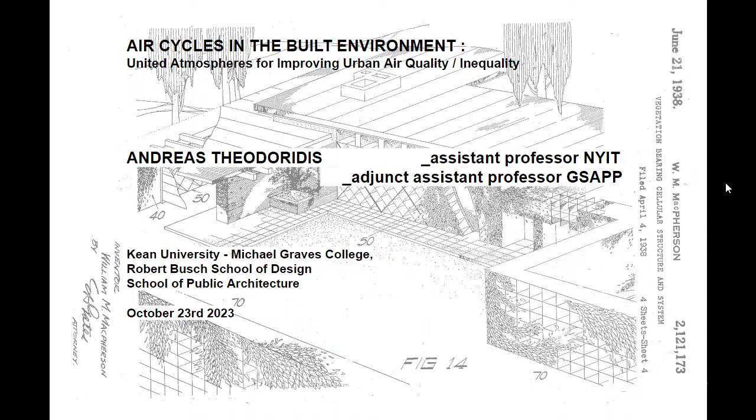And the reason why I'm going to do that, let's see if I can get this thing started. Up and down doesn't work for me. I might be doing something wrong. All right, so do I see the next one? Okay, so it's going to be on the screen directly.

So I'm going to mostly focus on two different sections, 2012 and before, and 2012 and after. The reason I'll do that is because I was mostly focusing on different parts of my work.

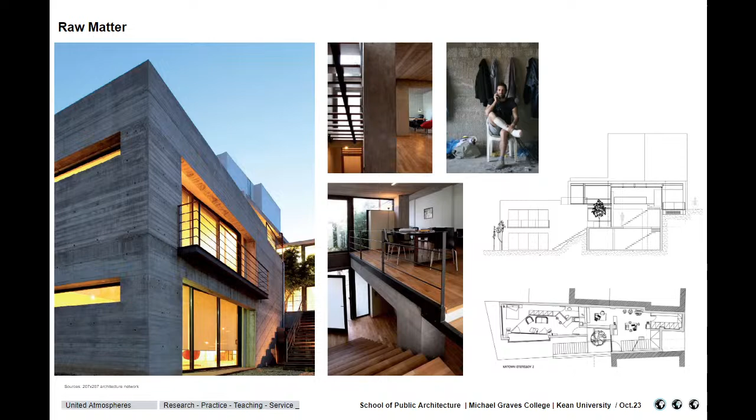Before 2012, what you see is me at one of my construction sites, overlooking some of the metal reinforcement bars, trying to do a couple of buildings in Greece, where I'm originally from. Different types of buildings, nevertheless with all the necessary details and drawings—houses and office units—under circumstances that were great, and some that were not so great, having injuries and things, but nevertheless still on my construction sites, trying to supervise some of my projects.

Small or bigger size innovations, smaller or kind of bigger projects, different materialities, different research questions, mostly focused on the use of materials—how we recirculate materials, upcycle and upgrade the kind of intention people had before they produced this kind of material into a different typology for the building section.

Here you see a project where I was reusing an existing wood floor, partially compensating the rest of the surrounding floor area with a new tile type after I demolished some of the walls—a gut renovation for a sixth floor, top floor building in one of the periphery cities of Athens.

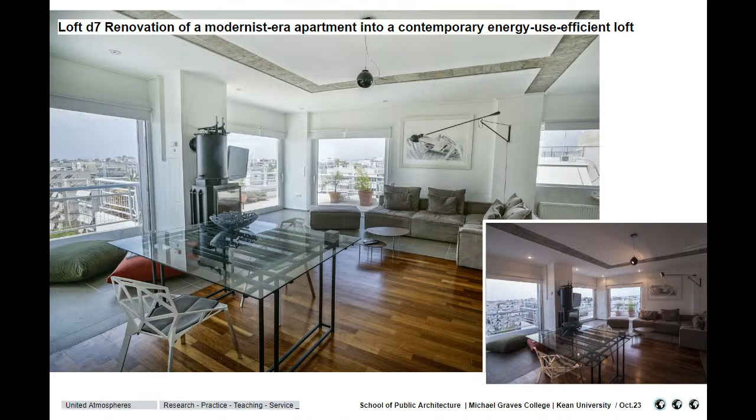Also introducing, back then, a system that wasn't quite popular for this typology of buildings—a heat device that heated the whole house and the water pipes of the systems through the burning of wood. Everyone was laughing at me back then, getting this thing onto the sixth floor with a crane from outside into the balcony of the building, and so on.

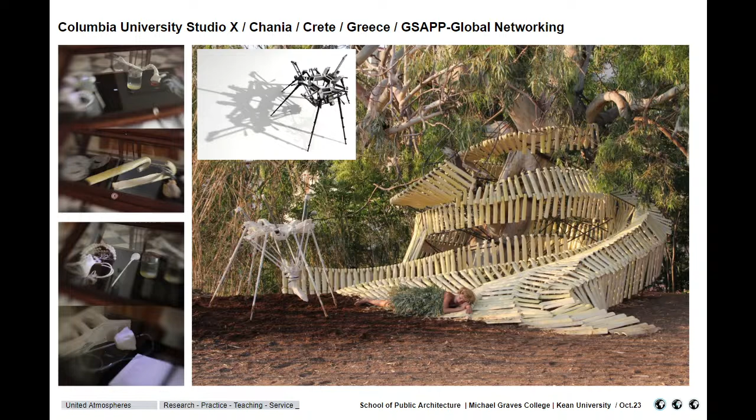But nevertheless, I was also experimenting with different kinds of constructions, different typologies of workshops—like the one you see here from back in 2013 or '14, if I remember well. This was Studio X, the global program of Columbia University with studios overseas. This one took place on the island of Crete, where we investigated with different media the life and materiality that could form a new, contemporary type of labyrinth on the same island where the labyrinth was invented a couple thousand years ago.

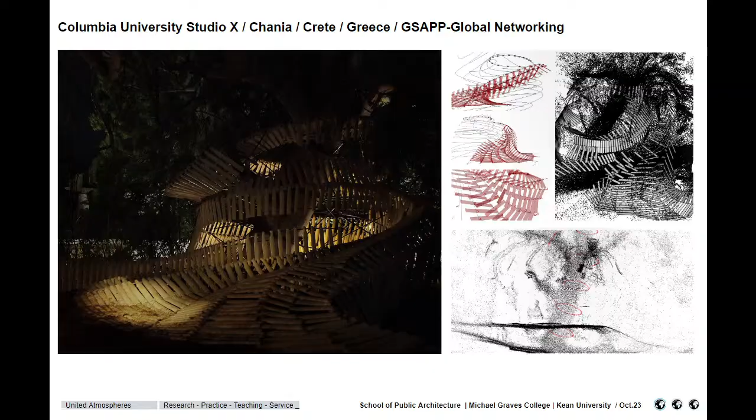And of course you can see many more projects from this individual, a little more pre-2012 professional life that I had as a practitioner, in my online portfolio, and soon maybe on my website if I manage to finish the back end of it—which I'll explain a bit more at the end of this lecture.

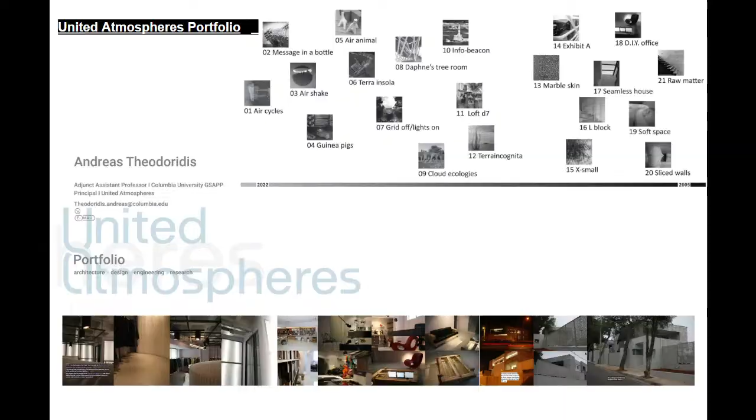Air quality on the human organism is the world's largest environmental health risk. And as a coincidence, the same kind of year in Greece, things were turning really badly in terms of air quality. The IMF was coming to the country.

During the day it's not so visible, but during the nighttime everything is quite toxic in the atmosphere. You get into your car in the morning and everything smells awful. You don't realize that might be toxic back then, but you realize something is wrong.

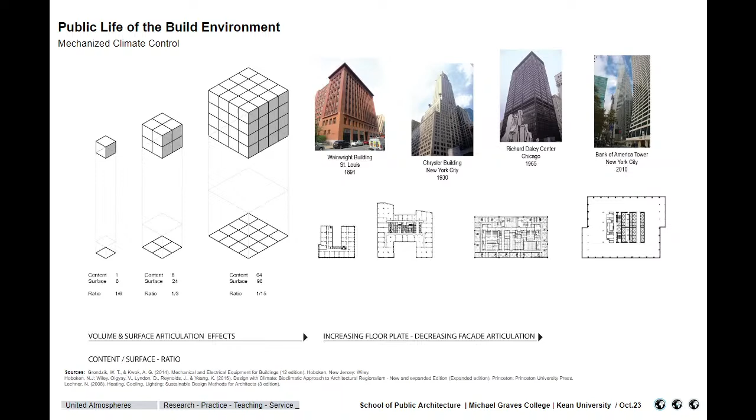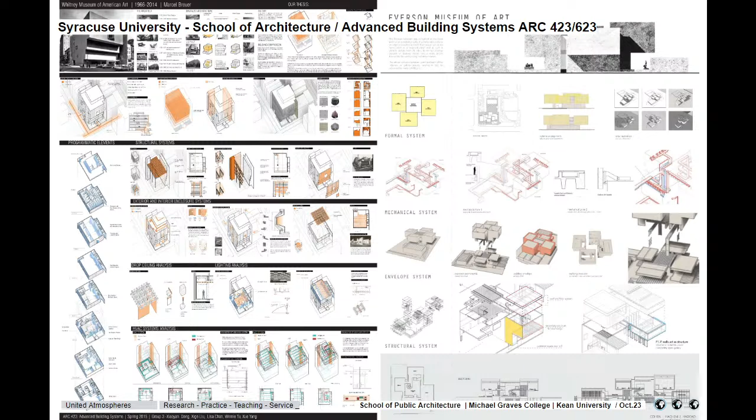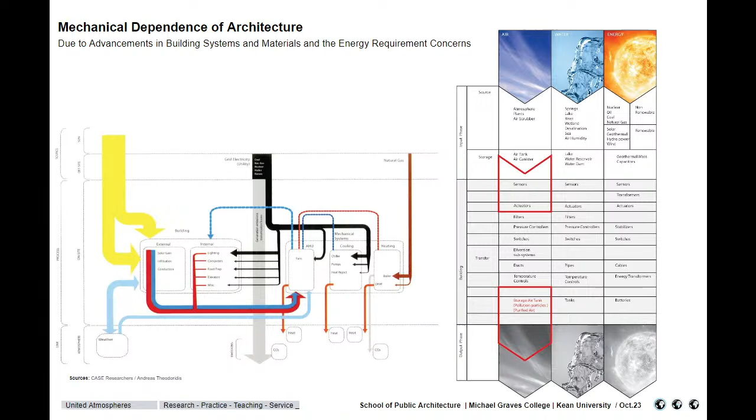Then moving further into my PhD at Case, starting to question things about mechanical systems, how we ventilate space, how they're related to the overall volume of buildings, what kind of effects they have in terms of how we handle air from the outdoors to indoors.

And why we consider in the discipline that we're dealing with two different things, like the outdoors and the indoors — what kind of envelope systems we currently use, how we describe them, what functions they have, why they have to be addressed so linearly that they only function in individual aspects like energy reduction, air handling, or glare conditions. Or can they maybe function in multiple layers? Can we reinvent a type of envelope?

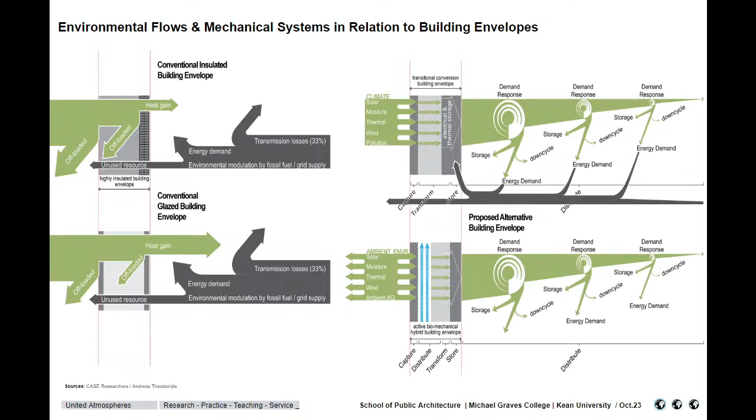All these were questions that I didn't necessarily have the experience to answer, but I was trying to figure out if I could navigate around the subjects in a more profound way, I guess.

In parallel with my PhD studies, since I had this practitioner's background as well, I was helping with other studios at RPI, dealing with materiality, how things come together, different types of materials that I hadn't used before.

What you see here is coming from a company that was trying to create a new type of bottle that wouldn't end up in a landfill, but would come together almost like a jigsaw, like Lego pieces building to each other. Everything you see here is self-assembled — there's no glue, no adhesive, nothing else. It's just these bottles standing alone.

We were trying to investigate how this new approach from the Friendship Products company could be a solution for regions of the world that might have some sort of catastrophe — a war zone, an earthquake, a hurricane, or something like that — where we would need to address these kinds of questions and maybe help people a little bit by sending this kind of equipment.

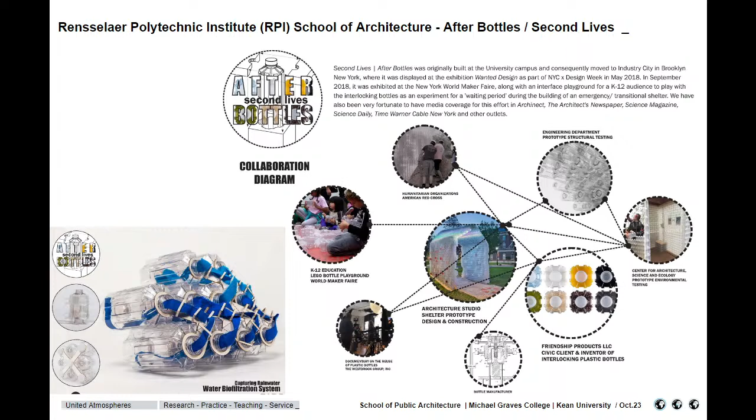So they use what's inside the bottles, and eventually turn them into shelters that can provide shelter for the first few days before everything else is put in place.

The questions I was having around this subject were not only about materiality and the relationship of things, how they get together, but also about scales of inquiry. What would be the scales of intervention of the systems we're looking for? Would it be global scale, urban scale, building scale, room scale, micro scale, or even nanoscale, since we are talking about air pollutants?

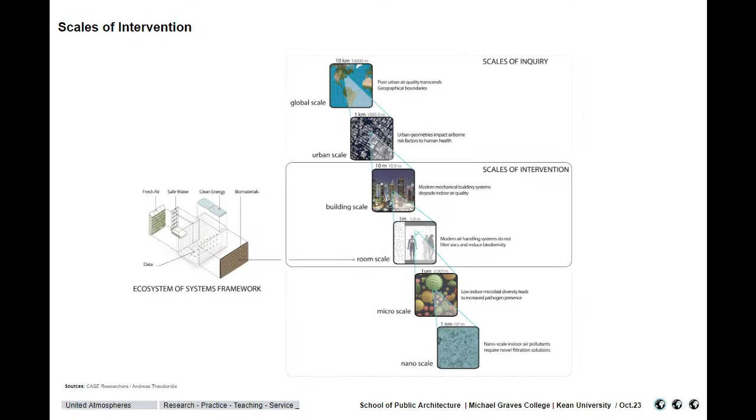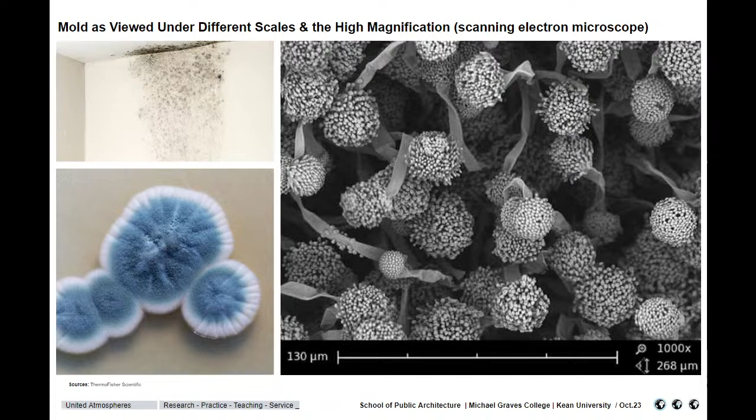And then mold as it's magnified into the micrometer scale. It looks interesting—it might be one of these nice parametric drawings you get out of Rhino, right? But in reality, it's the same thing we see in the wall, in an entirely different scale.

I was also trying to teach myself and educate the rest of the community. The slides you see now are from my last year course at GSAPP. What kind of scale are we talking about when we talk about air pollutants? We keep talking about micrometers.

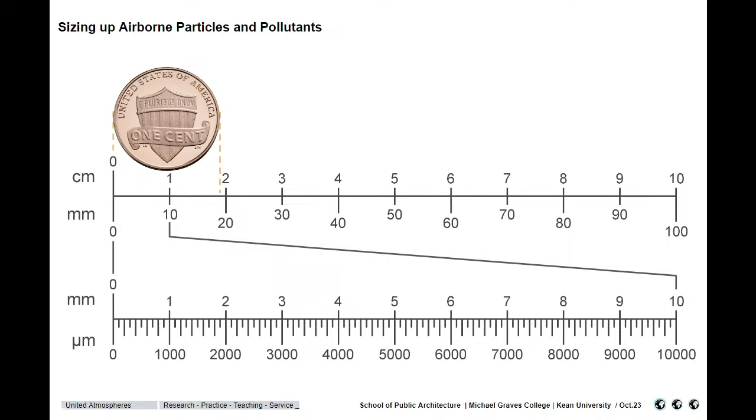Usually the highest size of pollutants we see in our environments is particulate matter 10, meaning particulate matter at 10 micrometers. What you see there is the size of the coin, the penny you saw before, with particulate matter 10. What you see is sand, a fine particle which is 90 micrometers in diameter, at the size corresponding to the coin. And then what you see around the sand, the blue spiky pieces, are particulate matter 10.

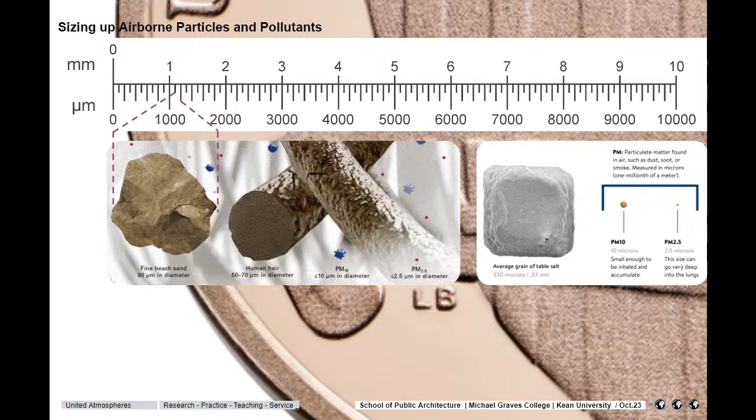The red ones are particulate matter 2.5. And all the obnoxious pollutants we're trying to find in our built environment are way below what you see there, the red spiky things. So you get a sense of what we think is invisible. In reality, it has a substance, a physical size, physical qualities, and we need to figure out ways to deal with these kinds of things.

I was also trying to investigate what we measure in our current environment—what is considered a pollutant. We know about particulate matter, NOxes, and other pollutants that the EPA, the Environmental Protection Agency of the United States, is measuring. CO2, though, is not considered a pollutant.

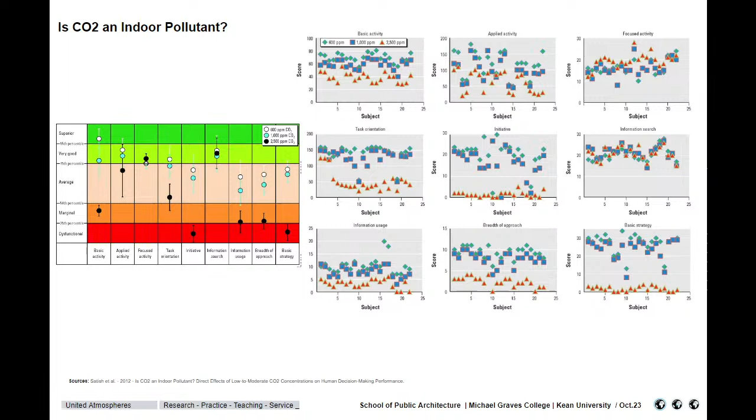Studies have recently shown that even at low levels of 600, as we probably have inside here right now in this space, CO2 has cognitive function effects on our brains. It makes you feel a bit more sleepy, makes your brain function slower, might make you unable to concentrate as clearly—but nevertheless we don't consider it a pollutant, because it doesn't kill us instantly, I guess. It needs to take a few more years.

I was also studying microplastics. Nobody considers them pollutants yet, although now with the advent of electric vehicles, they are emitted at higher rates into the atmosphere than the regular pollutants we were talking about before.

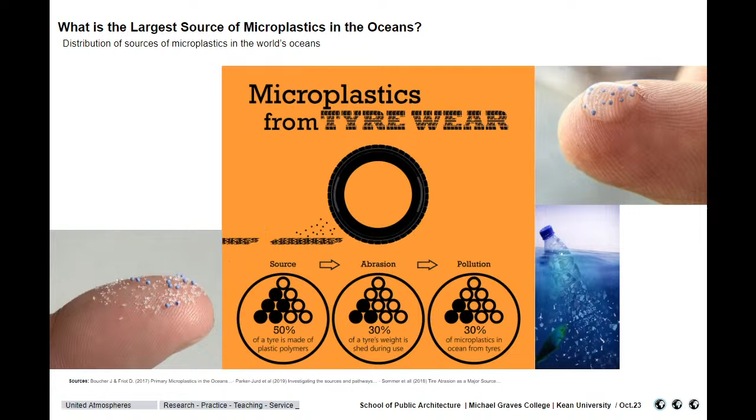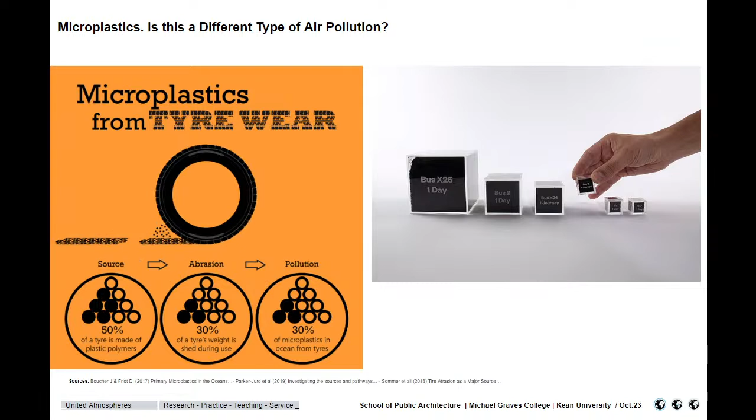The reason is that electric vehicles have heavier batteries, meaning the friction car tires have on street pavement is higher, and every time you use your tires they degrade at higher rates, creating higher concentration levels in the atmosphere. What you see in these transparent boxes is what car tires emit in a day from different types of vehicles in London. They seem concentrated and harmless, but imagine all these things getting into your lungs while walking in the street next to a bus or a car.

The idea was that I needed to study further how we deal with these questions—how we start understanding what kind of filters we're using in our buildings, what kind of equipment we're using, how we're trying to deal with these air pollutants.

And do comparative studies of the filters we consider more regular versus the ones considered more upgraded, like those used in medical labs and clean room spaces—the HEPA filters, the high efficiency filters. I can tell you fascinating stories of how the US military thought that after a radioactive incident they'd be able to get bulldozers and HEPA filters to clean the cities, and that's why they invented these filters.

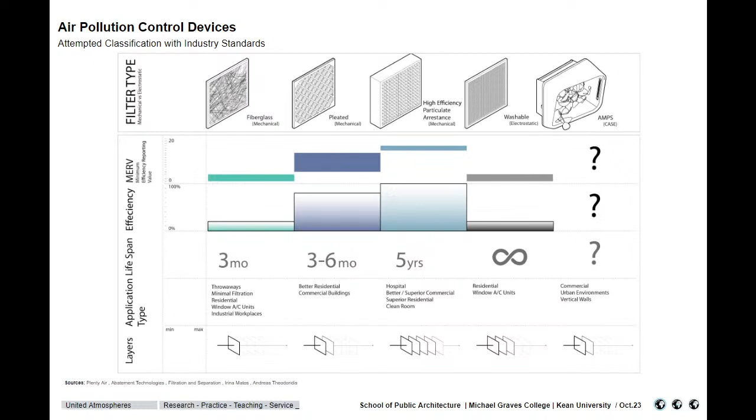In reality, though, they don't do much except for reducing some of the bigger size particles in the atmosphere. And I know it's a little daunting, but I can verify it with research work I was doing in my PhD.

It's not purely scientific. It tries to create a narrative mostly about how clean the air atmosphere could be in these places without disturbing the industry of production.

So in China, for instance, you're going to see some of the highest end pollutant levels just to make sure that they get below these levels and everything seems to be clear. But this is not the reality.

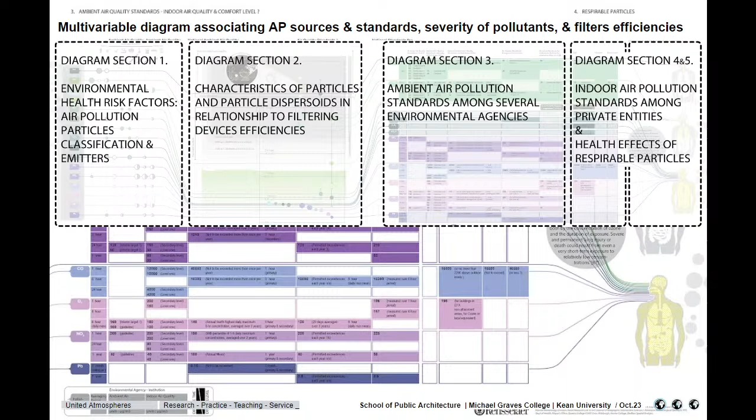Not only do they alter and manipulate what is considered pollution, they also don't measure a lot of them. And whenever they do, they don't measure them in a synthesis of what we understand as air pollution in our environments. We don't breathe air pollutants in isolation. We breathe them in a mixture of different pollutants, but we still measure them as being isolated in the environment.

I'm not going to focus too much on this diagram because it's very complicated, but the one thing you might need to focus on is that man-made pollutants—because there are also natural-made ones like volcanic ash and pollutants from forests—tend to be smaller in physical size, coming from incomplete combustion, and more lethal.

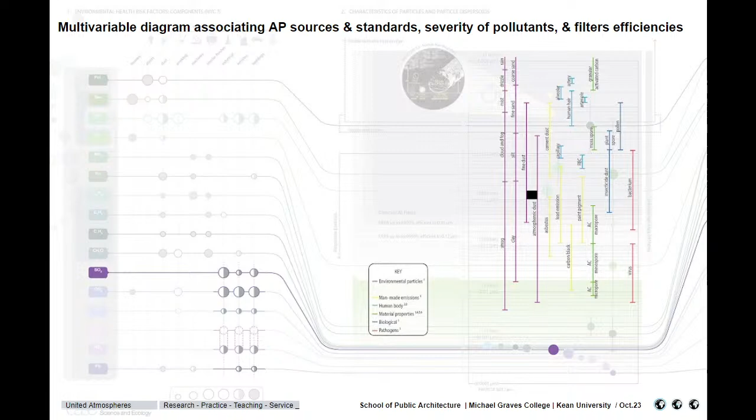Just to give you a sense of what I mean by lethal: air pollutants these days don't just go through your respiratory system into your bloodstream. They can go directly through your soft tissue to your brain. They're not even going through your respiratory system to the rest of your body organs—they're going to travel directly to your brain, affecting your brain function if they are small enough.

I'm sorry for bringing all this daunting information to you. I'm just trying to make sure we get a kind of perspective about the things we're talking about here. I was also terrified, and I'm trying to find solutions—that's the good part, I guess.

So I've been studying buildings, as I said, and I've been hearing about all these things—big planned auditoriums like this that have mechanical systems in them. Why do we need mechanical systems? Why don't we have naturally ventilated spaces? I'm coming from Greece, where windows barely close during the summer, not to mention even the winter sometimes. Why do people need all these kinds of systems for their spaces?

And I was thinking, well, why don't they have operable windows anymore in the States? Which is another question we can discuss later on. But I guess it was a very weird experience for me when at some point I ended up in a hotel in my first years in the States.

Amazing scenery, the hotel room was amazing, the lobby was great, everything smelled nice, and you could hear all the spring sounds from outside. But then you enter the building, and everything was in isolation—no operable windows, no humidity, no smell, no noise, no nothing.

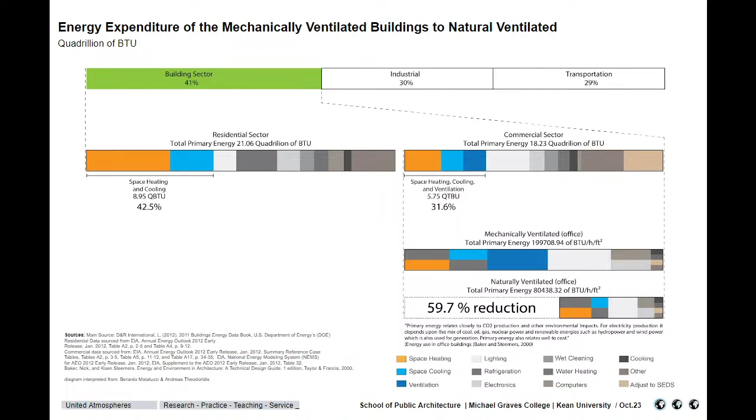That was back in 2012, maybe. But something was off.

And then I was trying to figure it out, and also trying to predict if we have to alter this mechanical to natural ventilation approach, where could that kind of technology be implemented in the future? Because the current building stock is going to be a little more difficult to adapt. What about the new building stock of the future?

So I created a series of maps trying to define how we're going to realize where the problem currently is, where the world population is going to keep growing, and where they're not going to have enough money to pay for mechanical systems. Not because they're underprivileged, but because I truly believe that in spaces that are renovating or developing economies, they can set a different paradigm, start thinking differently from what existing markets have reinforced into the built environment.

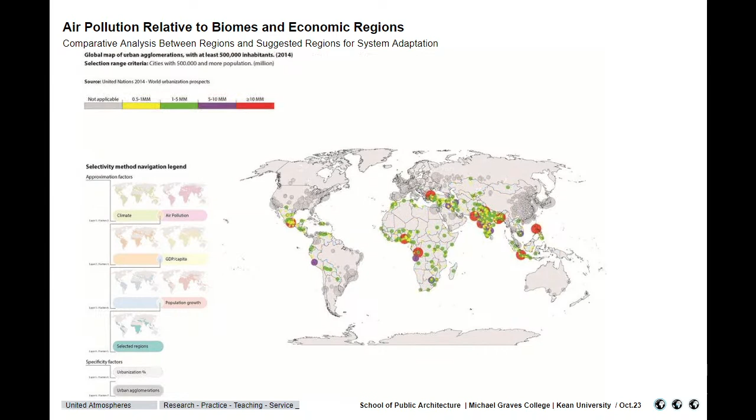And so I developed more detailed diagrams, almost a Venn intersection approach, trying to realize all these things through Köppen diagrams, World Health Organization diagrams, maps, data, GIS analysis, into 1 by 1 kilometer analysis, getting into numbers of where all these things are going to happen.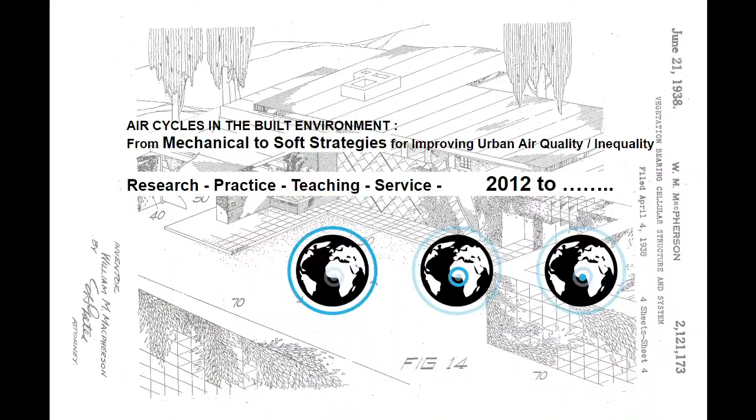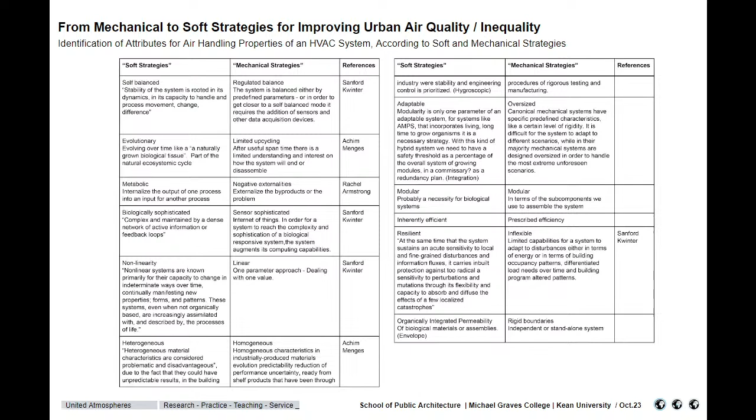But the important thing is that I was trying to develop, as part of my PhD work, how we move away from mechanical systems into what I was calling back then soft strategies. What soft strategies would mean for other people, I guess it would mean maybe self-balancing systems, evolutionary, metabolic, maybe biologically sophisticated, non-linear, heterogeneous — we can go on about how other people were defining soft versus hard — but the main idea is that we needed an entirely different type of system.

And that's what you see here. It looks like one of the regular green walls you might recognize from restaurants around you or other places, which is becoming a hit these days. But the one you see here also has a back end. The one placed here is actually in the Public Safety Answering Call Center 2 in the Bronx. The first one, I believe, is somewhere in Brooklyn, but this one here is in the Bronx.

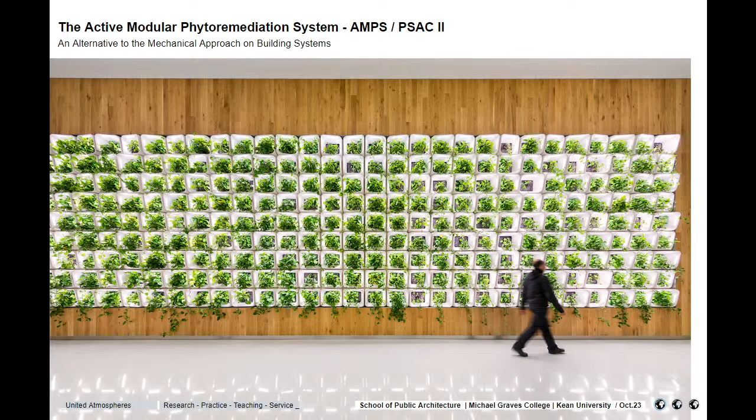It's a building that was developed by SOM. Back then, as I was saying, the program I was doing my PhD in was a hybrid program between SOM and RPI. We were stationed inside their SOM office in Wall Street, being the research department, and whenever they had a project, we co-developed it with them. This is a functional green wall — and what I mean by functional is an active green wall that uses energy to drag air through the rhizosphere of the plants in order to ameliorate some of these pollutants.

So this is what I mean by air pollutants and phytoremediation. We know that plants already reduce some pollutants through the leaves, but what we found after NASA research 20 years ago is that the rhizosphere of the plants actually does a much better job, by a magnitude of 200 mostly, depending on the plants you're using, and most importantly, the microbial community that surrounds this rhizosphere. The only problem is, guess what — the rhizosphere is inside the soil. So how do you drag air through that? I guess that's where the green walls we're working on come into play.

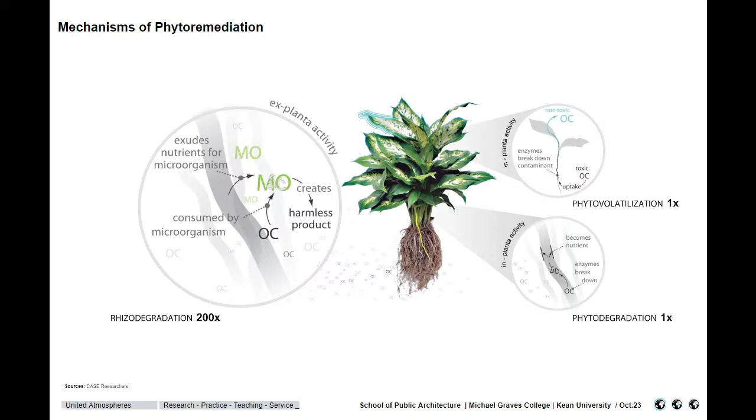They are more or less what you can describe as a vertical hydroponic system. It sounds nice and easy, not anything major to achieve, but plants are living organisms, which means you need to regulate the humidity, the lighting conditions, the circadian rhythm, what kind of microbial communities will eventually evolve there, the typology of the system, and keep them alive. It's not a mechanical system that you maintain every year or every six months, switch on the power button, and everything performs. Here we're talking about sensitive systems that have all sorts of other attributes you need to maintain — an important factor to consider when dealing with this kind of system.

If we start evaluating these systems in comparison to HVAC systems with the metrics we currently use for mechanical systems, they underperform. But if we use more inclusive metrics, like biophilia, air pollution, and maybe food production, which we are more recently investigating, you might realize we have a different sense of how we measure things.

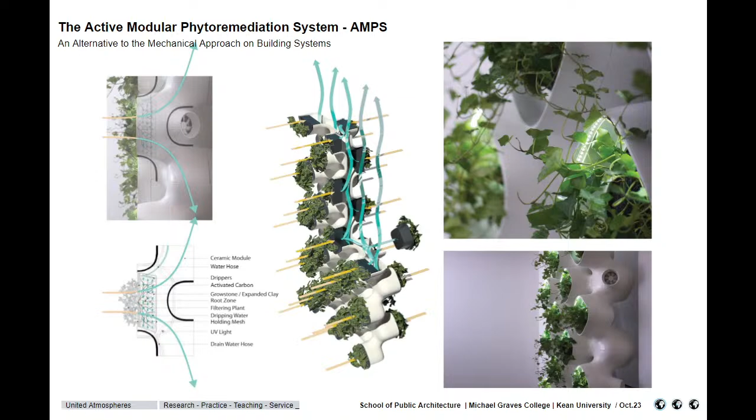I assume most of us who are around the building sciences know this famous mantra about 90% of our time being spent indoors. It's very interesting to consider these kinds of things. We also know that on average, 40% of the energy is consumed by heating, cooling, and ventilation systems in the States and other places.

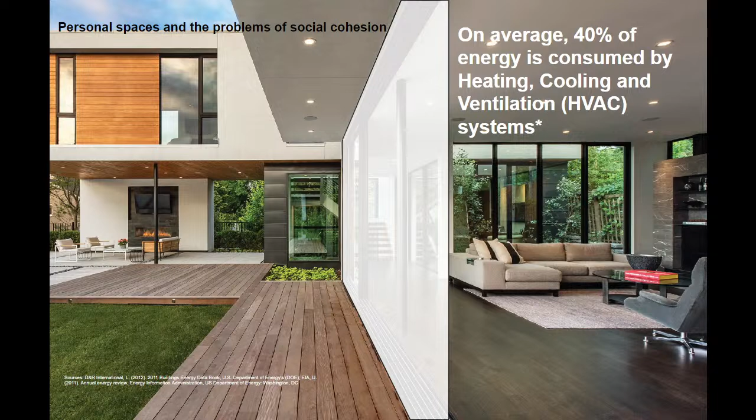But in reality, one thing we don't necessarily discuss is: is it the same for all sorts of buildings? Is it the same when the environmental conditions are favorable? And if so, how significant could the percentage of time we spend indoors be? For instance, if we have natural ventilation, does it really matter that 90% of our time is spent indoors? Do we use the same energy for regulating our space while we live there?

That's kind of the questions that brought me into developing this vertical ceramic wall system I was talking about. Within this context, my research focused on investigating a reinterpretation of the functional scope of the building envelope as a device to mediate both exterior and interior fields of atmospheric pollution.

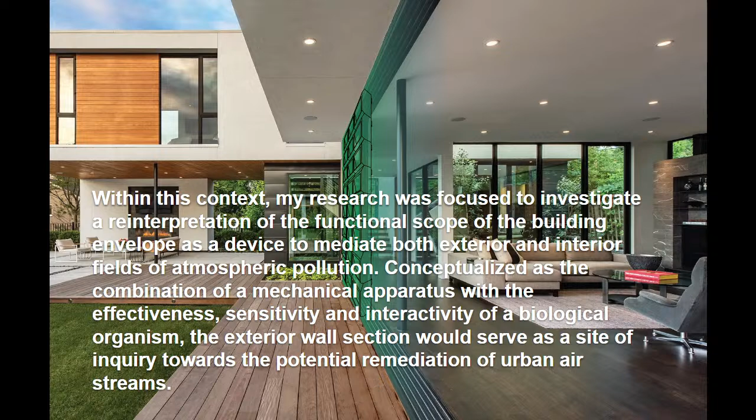Conceptualized as the combination of a mechanical apparatus with the effectiveness, sensitivity, and interactivity of a biological organism, the exterior wall section would serve as a site of inquiry towards the potential remediation of urban air streams.

There are a lot of these systems for indoors. There are only maybe one or two of them for outdoors, which is active and not a facade green that doesn't perform in any other way except evapotranspiration and bringing temperatures down into buildings.

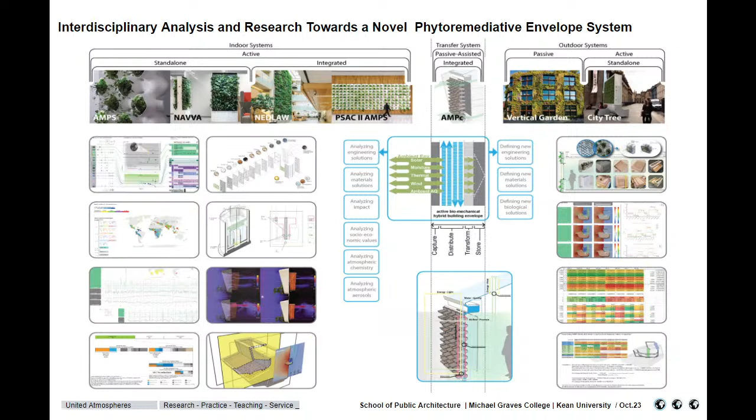What I was suggesting is using this in-between system, which is an envelope system. In my work, I've been analyzing existing systems in terms of materiality, and why do we need to

fabricate and market all these systems as such, to become a product, a commodity. Do we need to have all these materials for these kinds of systems? After all, we only need three major components: air, water, and energy.

Those are the three environmental flows that, if combined together, we can actually create a functional wall—and of course we need the plants. Everything else is supplementary; it's either there to withhold another system, tunnel the water, channel the energy, or whatever that might be.

But we don't necessarily need all these different materials. That's what I was trying to show—that for the system I'm proposing, we can minimize them to the absolutely necessary, if we don't consider them as a product or commodity, as something we need to sell to clients.

If, for instance, we could substitute in several regions of the world a component we're already using to build our houses, our indoor spaces—so if we could substitute brick with something that would be a functional new brick—you could actually get into

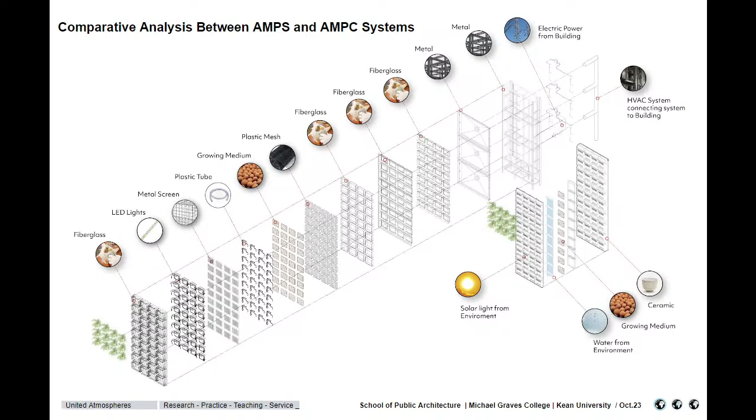minimizing this material use. And of course, I was trying to do these physical experiments because, as I said, our PhD was about applied research.

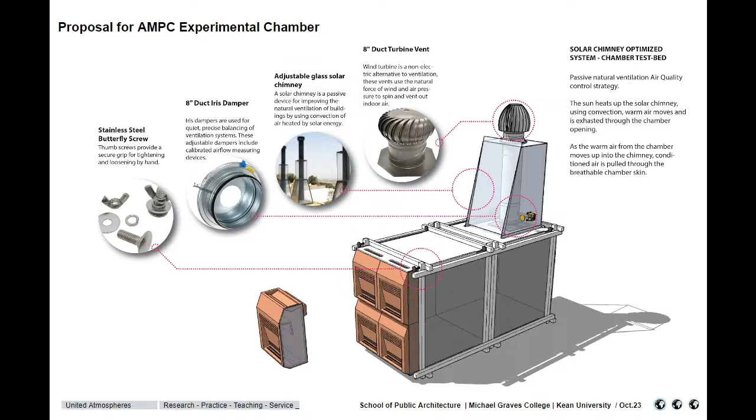And then, guess what? By the moment I was ready to get inside the lab, coronavirus was there. They kicked me out of my office and my lab in one night. Even my passport stayed in there, and I had to get a special permit to go get my passport to go back to Europe for the coronavirus period.

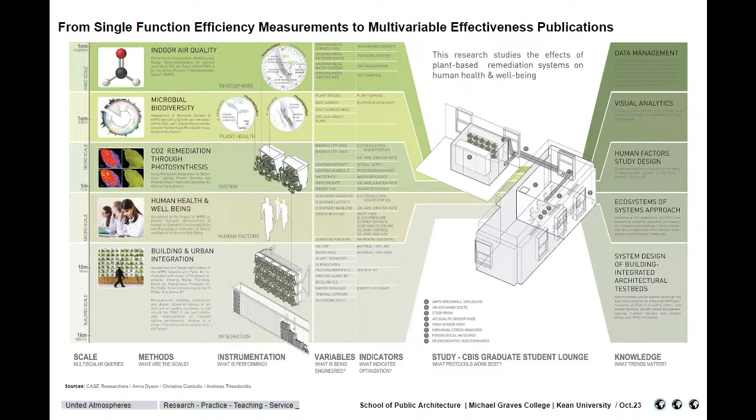So I transformed all my research into digital, upgraded my diagrams. We had already experimented at a different scale with human subjects.

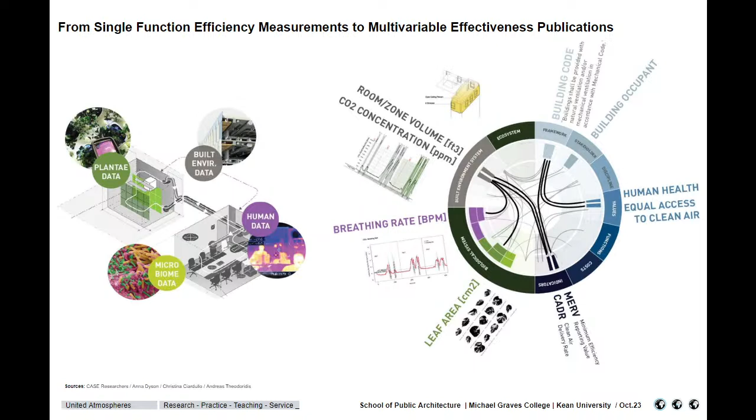As you can see, the diagrams were talking about this kind of data that I was trying to get out of these devices, the kind of environmental airflow chambers that I was trying to achieve here. I have already defined the variables that I was trying to measure, mostly related to airflow, as you can see.

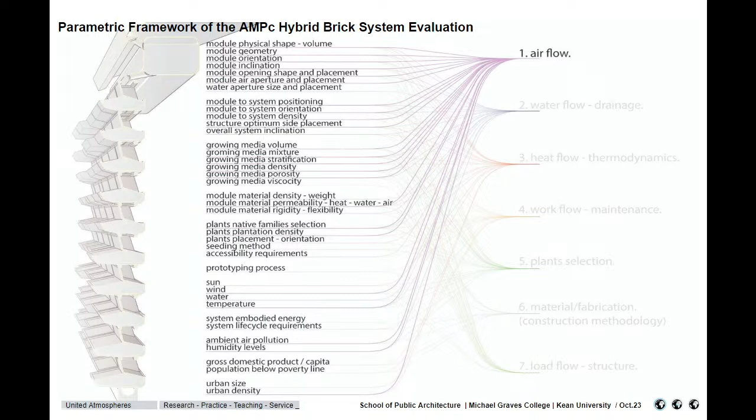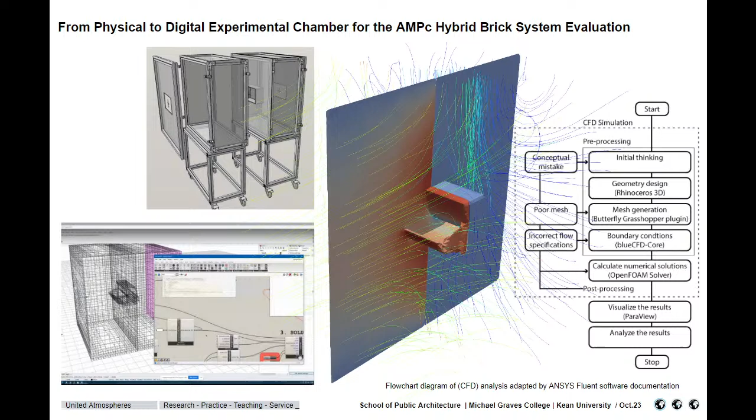And of course, then I had to transform all my research into a digital chamber. So I was struggling for the last 3 years to transform everything into a computational fluid dynamic environment, turning all my work into CFD, analyzing some of these brick walls, trying to define what kind of digital variables I should include into the computational fluid dynamics.

So I correlated air pollution with wind speed, temperature, and relative humidity in 3 different cities: Athens, Mexico City, and New Delhi in India, the worst air pollution environment by far in the world. The reason is because they have all these mountains surrounding the city that don't allow the wind streams to disperse the pollutants and get rid of some of these concentrations.

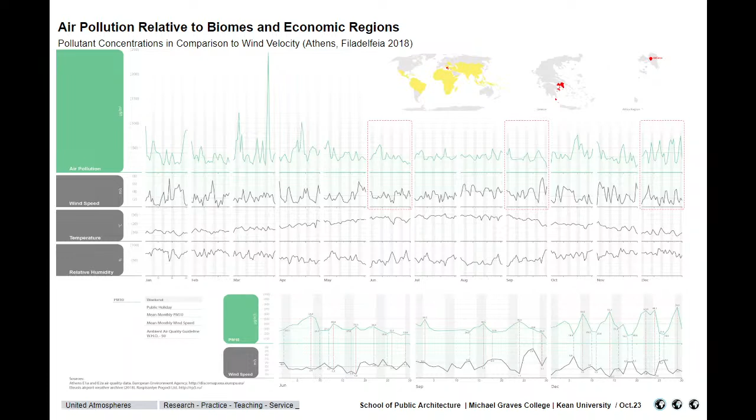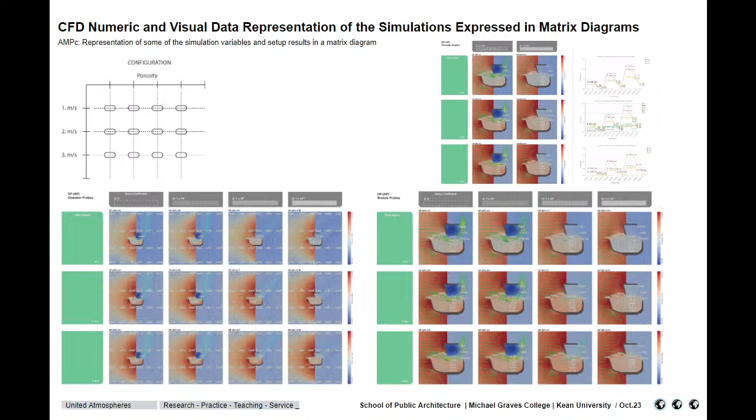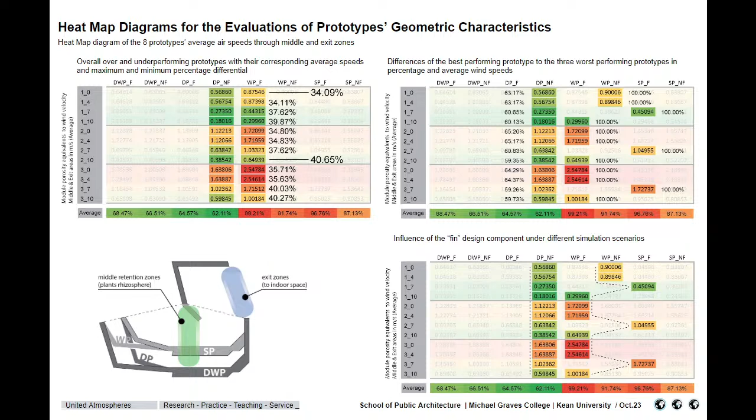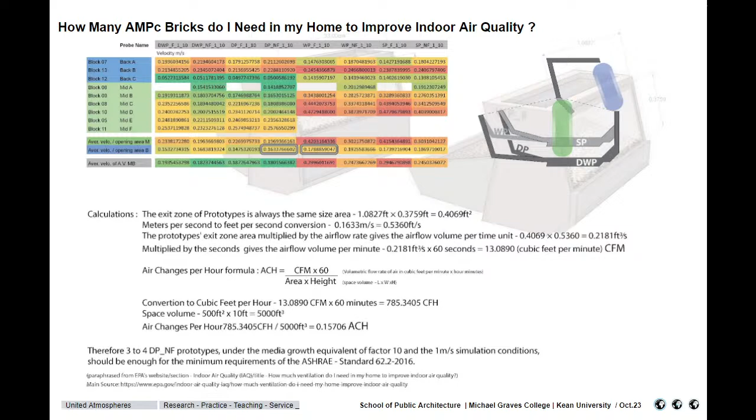As you can see down there, 4 different types of structures compared through heat diagrams, trying to identify how many I might need per ASHRAE metrics, just to make sure that whatever I'm describing here is not way out of context. I don't want to scare you with all these metrics and numbers, but the idea is that everything was here.

And then, of course, after all this work, maybe a decade of work, I was thinking, what am I doing as an architect? How am I incorporating all this work into the rest of my professional activities? This is where United Atmospheres came in, which, if you can bear with me, I'll go quickly through the statement here.

In architecture, the term atmosphere refers to the overall sensory experience of space, including its physical, emotional, and psychological qualities. It is a holistic concept that considers the interplay of various factors, such as lighting, materials, textures, sounds, temperature, and spatial arrangement in creating a particular ambience or mood.

Atmosphere is an essential aspect of architectural design, as it can significantly influence how people experience and interact with a space. Architects often use atmosphere as a design tool to evoke specific emotions, such as tranquility or excitement, and to communicate the intended purpose of a space.

Atmospheres can be shaped by a range of factors, including architectural and social dynamics. We recognize that a hostile atmosphere can negatively impact people's mental and physical health, while a friendly atmosphere can promote comfort and inclusion. Therefore, we believe in creating atmospheres that are welcoming, inclusive, and supportive of everyone. United Atmospheres is this kind of studio that tries to create healthy and sustainable living environments for all.

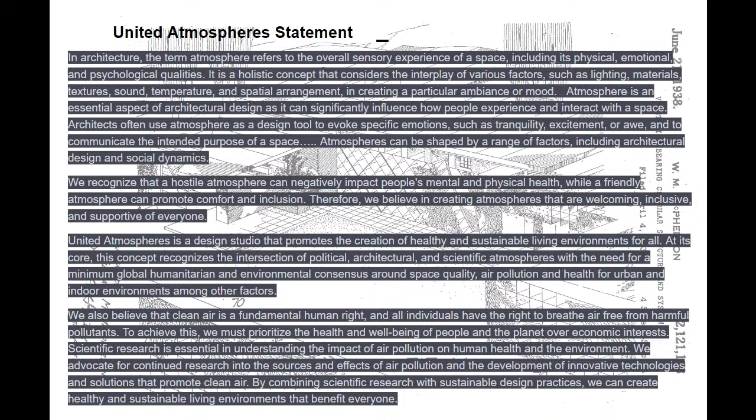More or less, this is what we believe in the work that I'm doing with my team members. And in that aspect, that's what I was trying to teach my GSAPP students last year as well. The studio was named after this concept, where I was trying to give back to the community some of the knowledge I have gained over the last few years, because I believe it's essential for young designers like yourselves to be educated around these subjects.

I think it's going to become a necessity in a few more years for everyone to at least know roughly what kind of concentrations we have inside the spaces that we're trying to synthesize and evaluate. In that sense, I was also collaborating with a startup company called Future Air, bringing sensors inside the Avery Hall building at Columbia, measuring the dean's office atmosphere, the classroom, and other places. Unfortunately, I cannot disclose what was going on with the pollutants in there, but maybe you can see it a little bit in the diagrams.

Trying to study urban canyons inside the city, what kind of pollutants they have in different settings, and educate the kids around these kinds of subjects—students studying their own personal spaces by getting devices and measuring what's going on, identifying problematic points and what they can do about it.

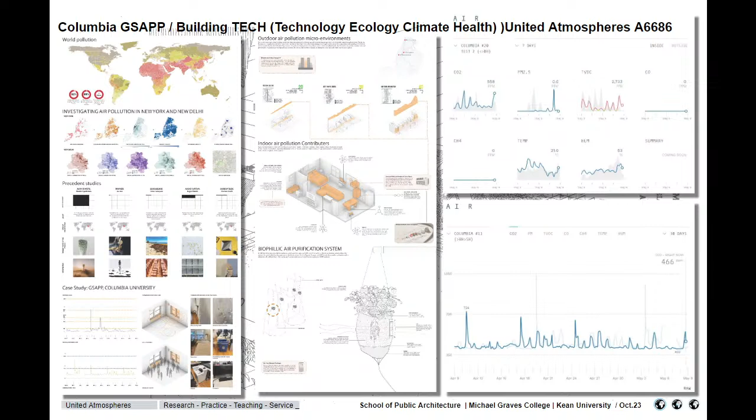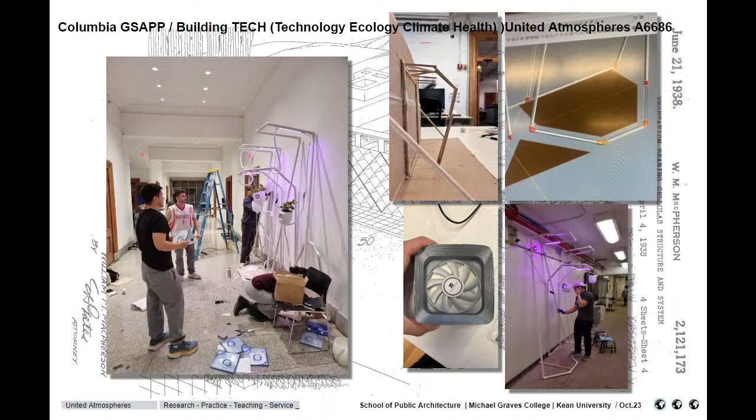And then at the end, trying to prototype a new type of so-called green wall, as we were naming it back then—something that's going to be disintegrated into what we're calling the seeds of air purification. So same system as you saw in the green wall, but in isolated modules that they were hanging from spaces, with other benefits.

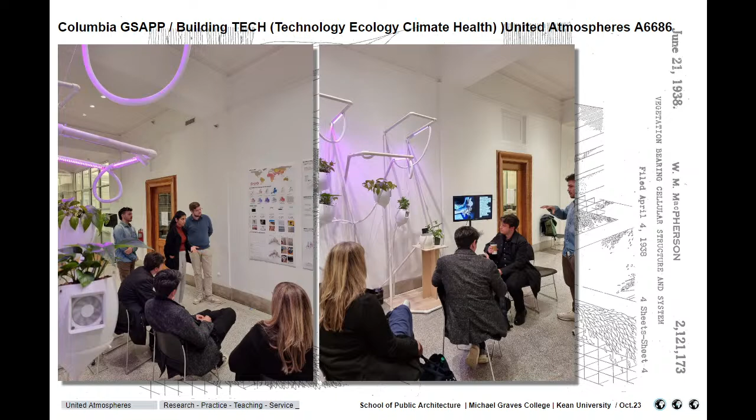By the way, this was a functional system prototype in less than 15 weeks of the semester—of course, not very well adjusted. At some point, if we don't keep track of the system, the plants would start dying, but the proof of evidence is here. It needs more funding, I guess.

That's the idea. With that, I was also teaching my students and the rest of the community about other subjects, like air quality and inequality. So what do we mean by inequality? We know what the concept of air quality is, but the index is usually conveyed with oversimplified numbers and color-based diagrams and standards that do not account for different ethnic groups, sex, and other characteristics of diversified human subjects. In contrast, recent studies have indicated that race appears to be a crucial factor in pollution exposure patterns, partly due to past discriminatory policy making.

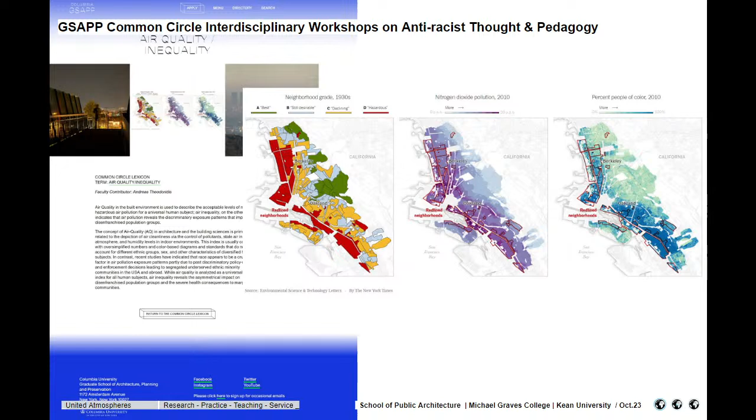And that's what you see here in Oakland. A few decades ago, somebody tried to identify these regions as red-lined regions. For those who don't know the term, it's associated with funding from institutions, either banks or public institutions—whatever was red-lined was considered a bit more of a risk. Usually the communities you'd see around were either underprivileged communities, communities of people of color, or others; they were not getting enough funding, and then all sorts of pollutant emission activities were approaching the area, creating what you see today.

Of course, as I said before, this is not the only thing I do. I'm not only teaching, or doing buildings, or studying around these subjects—I'm also writing about them in different media, more scientific, as you can see, presenting at different conferences, and less scientific, trying to educate a broader kind of audience.

And some of them are doing great—some have been received quite well, people were interested about it. Some have been translated into three different languages, which was amazing to me; I never expected that it would happen. And some of them have been turned into exhibitions, which is another interesting thing for me.

The work that I'm trying to do with our studio and the collaborators I have is a form of what I describe as an active form of scholarship. So it's not only about teaching, or only about making buildings, or only about doing research—it's about trying to bring all the work I do into creating some sort of a new entry, a new step for moving forward with the overall theme, if I can describe it that way.

Exhibitions are a big part of it. I'm collaborating with metal manufacturers to create this sample of green wall, but also to show the metrics and start educating people. What you see here is from the Tallinn Biennial a year ago, I believe, Stephanie, maybe.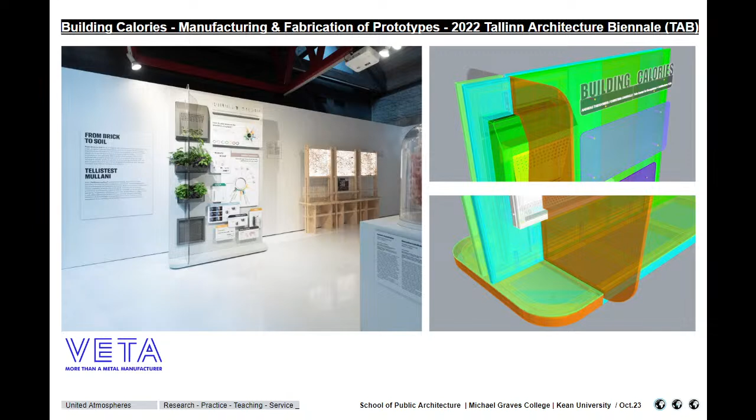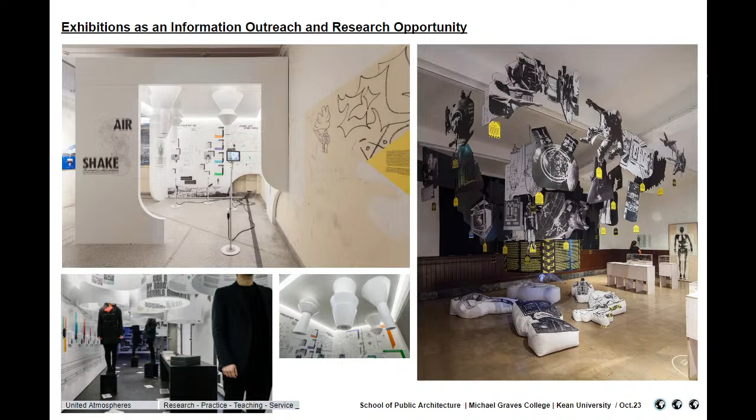One of the pieces over there, I've also been working with the biomaterial I mentioned, at the Oslo Triennial a couple of years ago; the Onassis Foundation in Athens, Greece, a storefront for art and architecture; and the Istanbul Design Biennial—all related to human subjects, air pollution, and these kinds of themes.

And of course, discussing all these subjects with broader audiences—like at the ESO conference about indoor spaces in Greece. I don't know why the video doesn't play, but that's not the point here. You see me live, that's good enough, I guess.

Tallinn, again, broader audience, not just for the architects. It's very important to me, all this knowledge to be transferred to the audiences so they might start thinking about these subjects. UN Sense, the UN Studio Research Department, discussing how we can incorporate these kinds of systems into some of their new buildings.

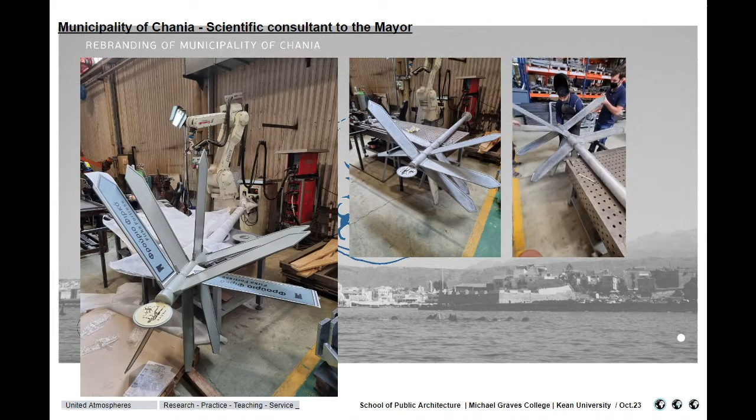And of course, during the pandemic years, which I was back in Greece, I was serving as a scientific advisor of the mayor of the city of Chania in Crete, trying to persuade them how we can alter a few things, maybe digital design a few urban infrastructure, eventually with a goal to start pushing them towards green infrastructure in the city, which I've never managed to do, but at least I was trying. And then also serving in the Center of Mediterranean Architecture, which is an old Venetian arsenal in the city, as an architectural committee member.

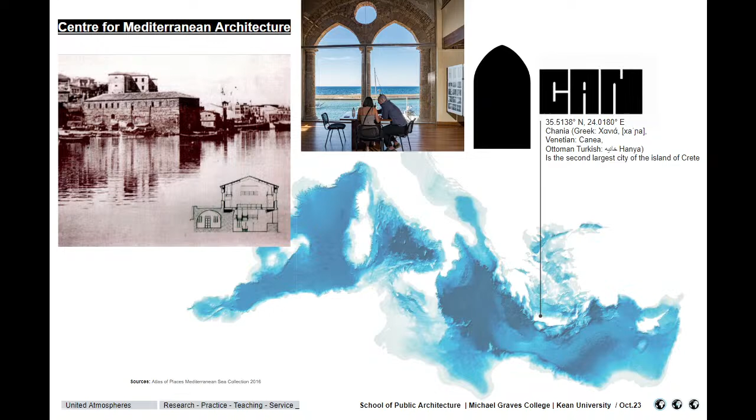Anthony was there a couple of years ago. He will be missed. He was a dear family friend. He did us the honor of being there to give us an amazing lecture three years ago. We still every day think about him. I know that's very recent, but his texts are going to remain among us, at least.

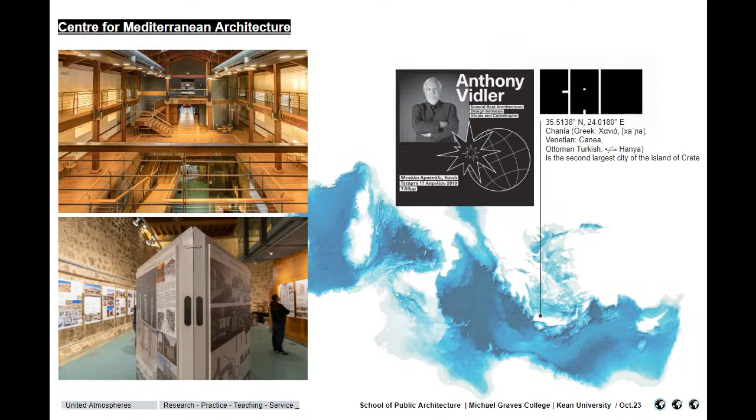World Health Organization as well, trying to do different kinds of workshops in the same place, and also serving as part of different committees in different magazines related to this kind of work.

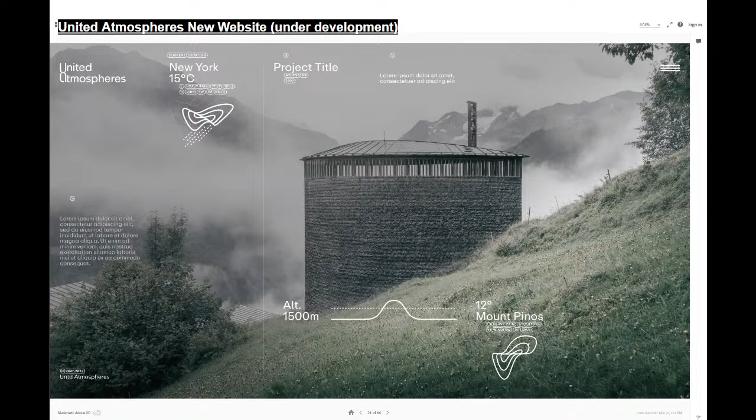And guess what? This is how my new website would look like one day, but it's not there yet. It's almost there. We have the front end. Now we have to finish the back end. And at some point, I might be able to start uploading my projects as well.

And with that, I don't want to scare you more with air pollutants. I will leave it open for you and any questions you might have. Thank you so much.

Questions? How can a concept like this be introduced into more, not necessarily in a wall, but more into a group kind of intervention? So every time that we're trying to implement one of the systems into our overall massing, we are talking about space occupation. It's either going to be a mechanical floor or a system that gets a space, or it might be a void to get a few pipes through.

I guess the way that you can do it is trying to define what you're trying to get out of the system. The way that I did it, I was trying to substitute the kind of envelope component with this new kind of wall. So instead of using excess space for introducing this kind of system, I was trying to implement this new system into environments that could actually accommodate it based on their biome conditions, temperature, humidity, and so on.

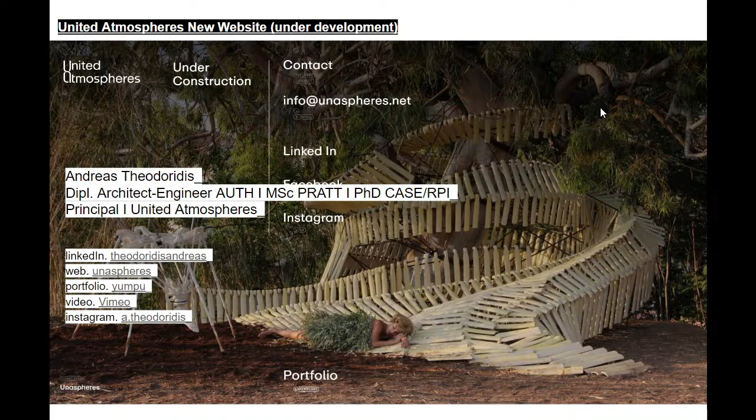Names are important. Yes, thank you. Thank you so much. Thank you so much. Thank you so much for inviting me. It was great to have such a nice audience. Cool, that was great.